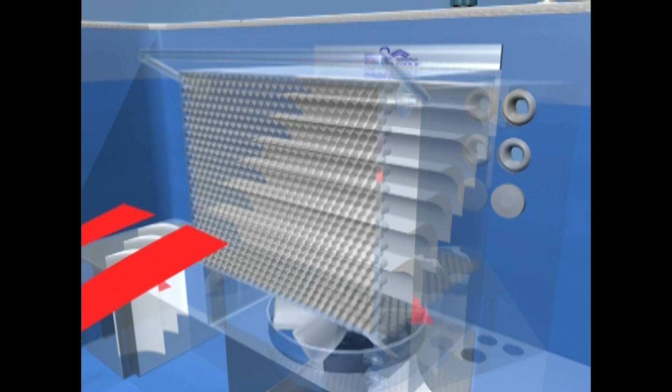The water current in an Endless Pool is what allows you to enjoy the highest quality swim in such a small space. In an Endless Pool, the current is wider than your body and deeper than your stroke.

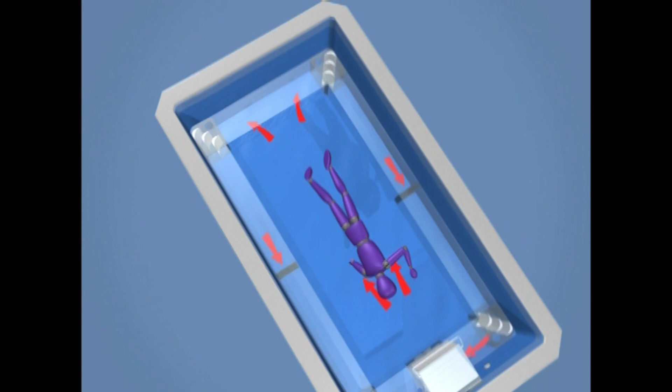Water flows in a river-like current past the swimmer and through a protective grill at the rear of the pool. Separating into two streams, the water returns to the front of the pool through the channels, which also serve as seating.

Guided by arrays of turning vanes to minimize turbulence and increase efficiency, the streams of water join at the front, pass through our propulsion housing, and enter the swimming area after passing through the conditioning grill. The stream of water that emerges is smooth, even, and completely adjustable in speed.

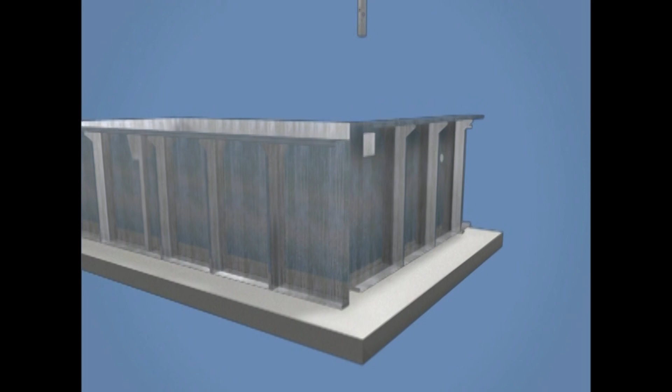Let's begin with a simple installation on a solid level surface. The first step is to assemble the 6 steel panels to form a rectangle. Panels are joined together with 3/8 nuts and bolts. Hardware is supplied to reinforce each of these corners. The front panel has cutouts to accommodate all of the standard through-wall connections.

At the top of each long wall, heavy reinforcing channels are installed to stiffen the pool enclosure. The pool may be anchored into the floor using the anchor bolts provided. Optional tension straps may also be used.

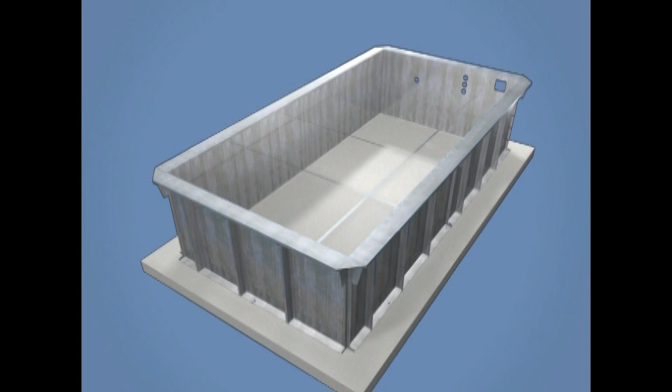Along the top edge of the pool, an optional aluminum coping system is installed to provide a finished surface. When a custom coping is desired, we provide a simple liner hanger system around the perimeter. A heavy gauge membrane is next. This holds the water and provides a soft, durable finish to the inside of the pool.

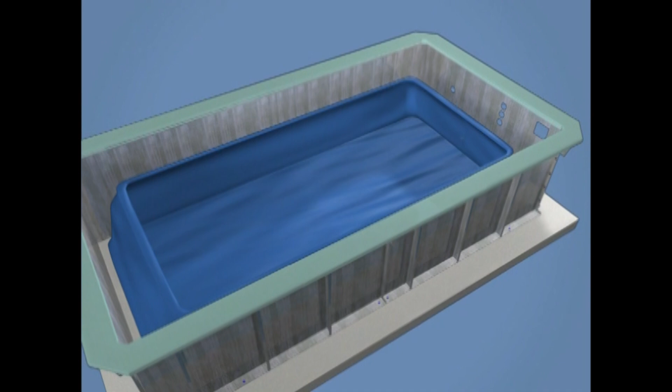To create the unique swim current in an Endless Pool, we installed a stainless steel propulsion system at the front of the pool. This unit pulls water through 4 stainless steel channels on either side of the pool. At the rear, in each corner, we place a turning vane array. We connect this system of water return channels with a perforated stainless steel outlet grill at the back of the pool.

Both the 5 horsepower hydraulic power unit used to create the swim current and the water quality system used to heat, filter, and sanitize the water can be located up to 75 feet away.

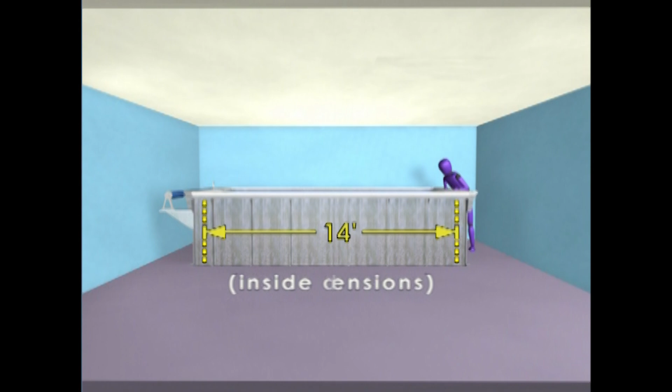An interior space is really just a floor, a ceiling, and vertical walls. In a 20-foot long room, a standard Endless Pool looks like this. But maybe there's something in the way, or the room is smaller. We can reduce the length of an Endless Pool by as much as 2 feet, or we can change the orientation of the pool.

This would allow us to choose a wider pool. We make pools 1, 2, or even 3 feet wider. And we can also make them 2 feet longer. Looking again at our standard Endless Pool, we can see that building a deck around the pool makes it easier to get into the pool and makes it appear built in.

The ceiling height determines how high this deck can be. An Endless Pool will fit even with a very low ceiling height. When the pool is installed above ground like this, a small step or two is especially helpful. Of course, you can also excavate and sink the pool into the floor to achieve these same benefits. But unless your project involves new construction, this excavation is more costly than building a deck around a freestanding pool.

With an Endless Pool, the largest component is the pool panel. Whether you're installing the pool in an existing space or relocating it to a new space, the great thing about an indoor installation is that you can swim year-round.

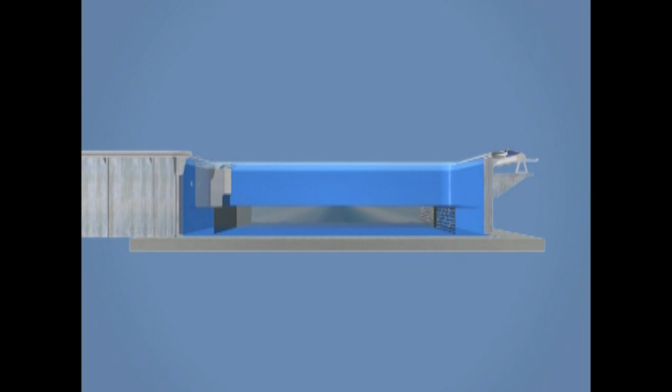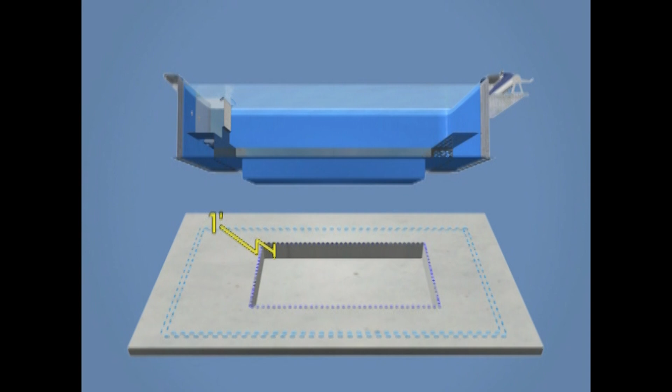By creating a deeper area in the concrete base and ordering a custom liner to fit this deeper area, you can make your endless pool whatever depth you want. Here, the deeper area is 1 foot. This yields a water depth of 39 inches plus 12 inches for a total of 51 inches, ideal for water exercises, depending on your height. Of course, depth is relative.

If you can't decide what depth you need, a pool with multiple depths is an option. The real question is, who will use the pool and how will they use it? We recommend that you leave a shelf at the front to accommodate the angled mirror and to help you step in and out of the front of the pool.

A step can be located in any of the 4 corners. A step located near a shelf makes getting in and out even easier. You can see how a partially in-ground pool is the easiest to access. If you install your pool fully in ground, you may choose our optional railing and stair.

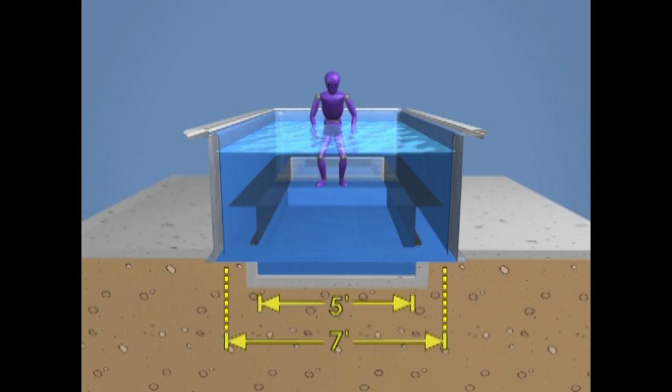If you do, you'll need to extend this shelf or reduce the length of the deeper area to accommodate the stairs. Looking at the pool in cross-section, we can see that the benches on either side are 1 foot wide. This means that the deeper area can only be 5 feet wide for our standard pool. When the pool is made 3 feet wider, of course, the deeper area can also be wider.

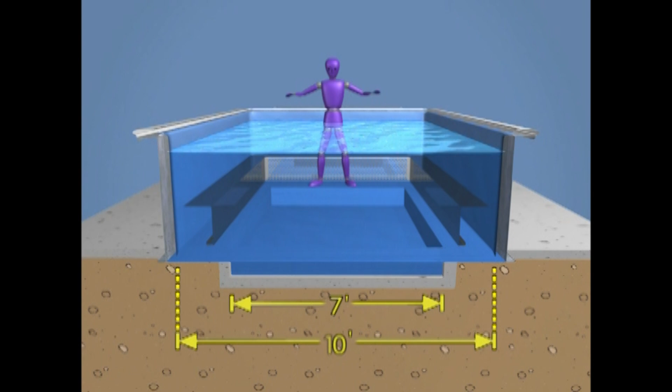We see that as the pool is made wider, you have some flexibility regarding the dimensions of the exposed shelf on either side. The exposed shelves make it easier to step up and down from the benches. For narrower pools, these side shelves might get in the way, and we don't recommend them.

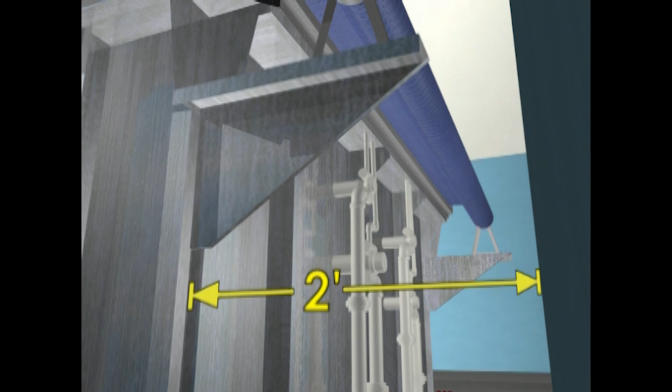At the rear, we recommend a shelf so that you have a place to put your feet while you sit on the rear bench. If you select the optional hydrotherapy jets, we recommend installing them on the back wall, under the cover. Be sure to leave sufficient access for service, and always refer to our printed technical materials when planning your project.

Of course, if you plan to get in and out of the back of the pool, the shelf should be designed to accommodate either a corner step or a full set of stairs. It is important to recognize that some site work is required to accomplish a deeper pool. As we've seen, rather than install the endless pool on a flat surface, you'll need a surface with a section cut out.

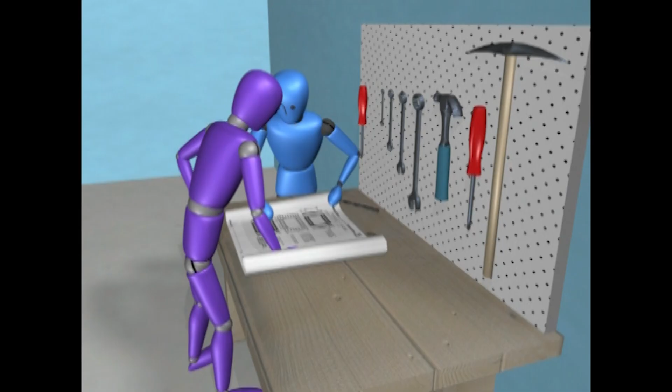For our standard pool, shown here, we can see the room left at the front and back for shelves. We can also see the room for the stainless steel benches on either side. Forming this in concrete is relatively straightforward. If you don't want to dig down through an existing cement slab, you can simply build a plywood platform to achieve a deeper pool without excavation.

We supply drawings illustrating how this can be done simply and inexpensively for deeper areas up to a foot. Many of our customers build these platforms to achieve the water depth they desire, often in cases when they plan to relocate their pool.

Custom deeper liners are typically ordered after the panels are in place, and you can verify as-built dimensions. Always allow a few weeks for the fabrication of your custom liner. While waiting for the liner to arrive, construction can continue. Building this platform in plywood can be done in ground floor spaces with ceilings that can accommodate a pool higher than 42 inches. In a case like this, a deck may be constructed to make the pool appear built in.

Of course, you can also dig down. This involves more excavation and at least 2 levels of concrete. The upper level supports the pool panels, the stainless steel underwater benches, and the propulsion housing. The lower level, between the benches, forms the deeper area. The endless pool deeper option gives you a custom pool to meet your exact swimming and exercise requirements.

Anytime you put a pool indoors, humidity is an important consideration. With our optional retractable security cover, water evaporates from an Endless Pool only when the pool is uncovered. The rate of evaporation from an uncovered pool that is not in use is easy to calculate. In a typical indoor pool room, this evaporation depends on the temperature of the water, the temperature of the room, the relative humidity of the room, and of course the size of the pool you select.

A standard Endless Pool has less than 100 square feet of open water surface. If the water is kept at 84 degrees, the room is kept at 80 degrees, and the relative humidity of the room is 60%, the pool will lose 2 pints of water every hour it is left open. So if you open your Endless Pool for a half-hour swim, you'll lose at least 1 pint of water into the room. Now, a pint isn't much.

On the other hand, if you keep it open 24 hours a day, or it's just the kids, remember, no diving, kids, and you select hydrotherapy jets and never turn them off, you could have a problem. If we were outdoors, we wouldn't care. But indoors, we need to plan for moisture.